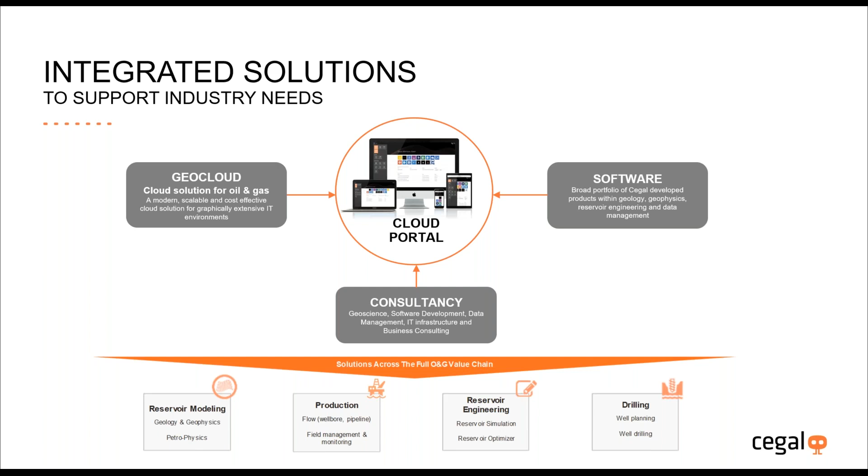And with this, I leave the floor to my colleague Gaston, who will take over and talk about Rocks Velocity, which is the key presentation as of today. So Gaston, feel free to take over with your presentation.

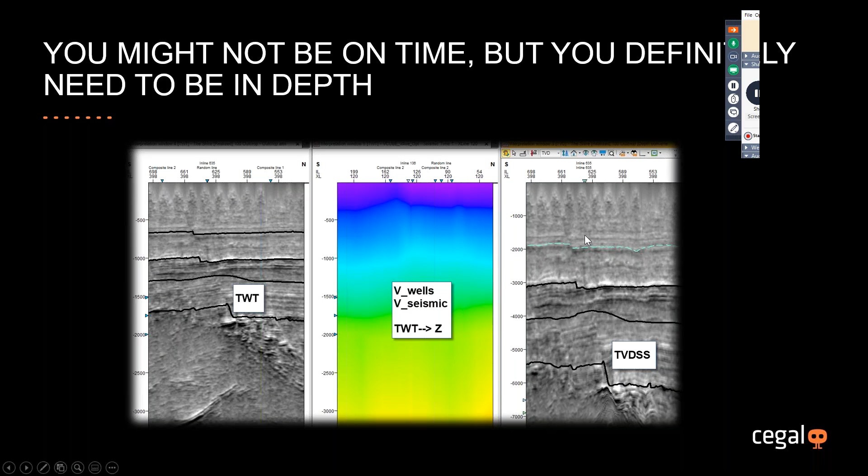So we started with this app a couple of years ago, sponsored by an operator in the North Sea, and they wanted us to help them solve some common problems.

If you start building a velocity model, you know you have some issues to sort out, like lack of sonic calibrated check shot surveys. You may have good stacking or RMS velocities providing good coverage, but they lack precision, and obviously there is noise and lots of uncertainty.

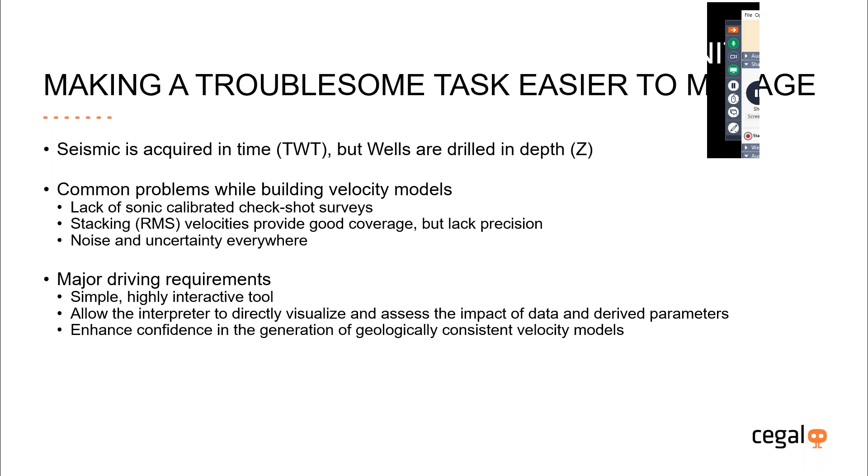The major requirement for this tool was to make something simple, highly interactive, so that the interpreter is continuously visualizing and assessing the impact of the data whenever he or she derives any parameters. So you have the ability to look at your velocities all the time and create with good confidence a geologically consistent velocity model.

This is a display of the main workflow of the app. We start by loading wells and, if they are available, seismic velocities into the application. There's visual QC, and then you go into several of the steps.

At any time, you define the surfaces and the markers. At this point, I must say we use a standard method in the industry, which is called a layer cake approach.

And we go from there - lots of tables and QC options. This is something very well received by our users, because looking at the data is really important in this case.

Then there's a workflow to calibrate the seismic velocities with the well velocities. There is no need to build any 3D grid or do some complicated 3D model building activities in Petrel - you just do it in the app.

Then you define your parameters for each of the layers that you have. But at the moment of doing this, you visualize your velocity maps almost in real time if you want.

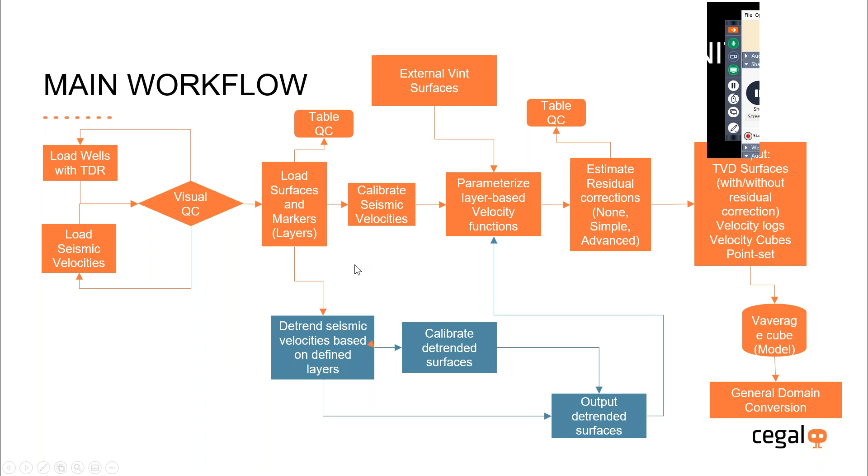We have added in the new release, release 3, a new workflow based on detrending the seismic velocities. So with this, I believe it's better to go into demo time.

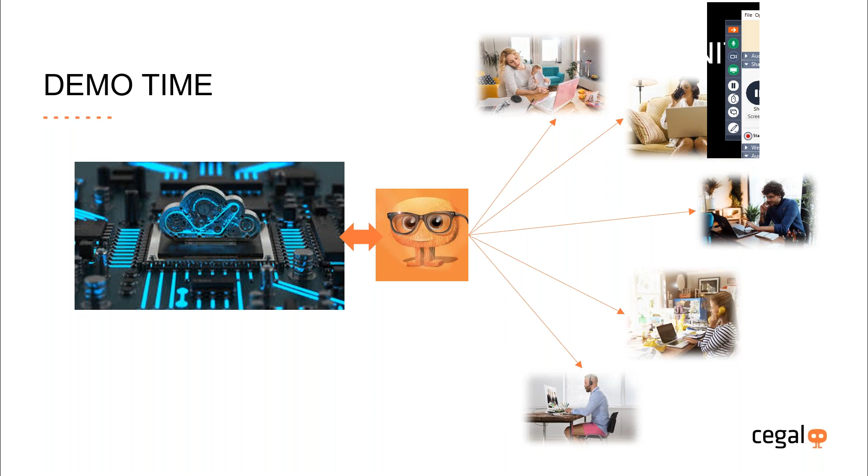This is a small project from the North Sea. We will have a few surfaces, and I also have created an intersection line where we're going to see our results.

This is in the time domain now. So we have the usual setup, some wells, some of them are deviated, you have markers, you have some interpreted surfaces, and then the challenge is to depth convert this.

There is also in this data set some additional information, like lots of stacking velocities here, and they pose a special challenge. In this case, they are not regularly sampled - this is the way they came from processing. So I had to do a bit of massaging before on those.

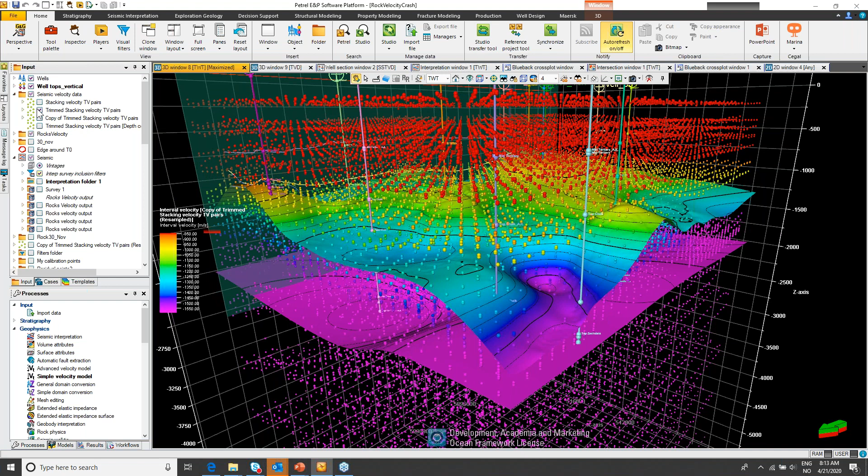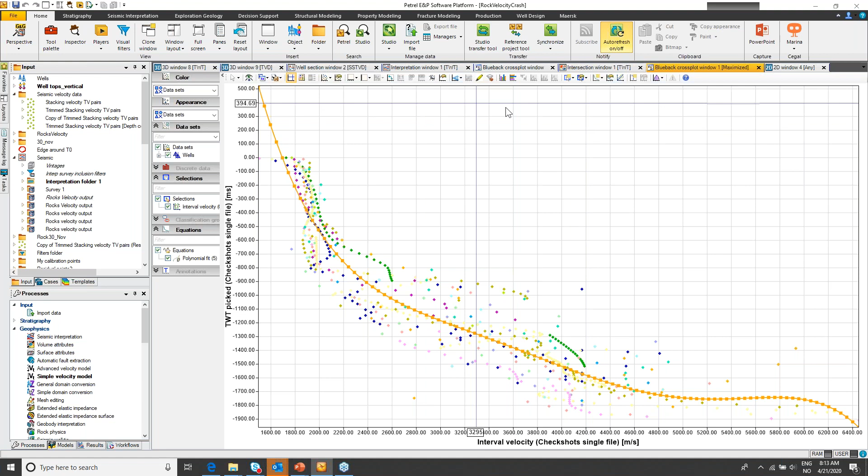But one very handy application that helped me on this is, for example, the Blueback GDI Investigator. So I was able to define some interesting trends with that. So that's a bit of staging the scene.

So I will just go and show you some of the interfaces related to our app, and rush through the workflow if you want. There is no time to do a detailed analysis on what Rocks Velocity can do, but we hope we can excite your appetite for more.

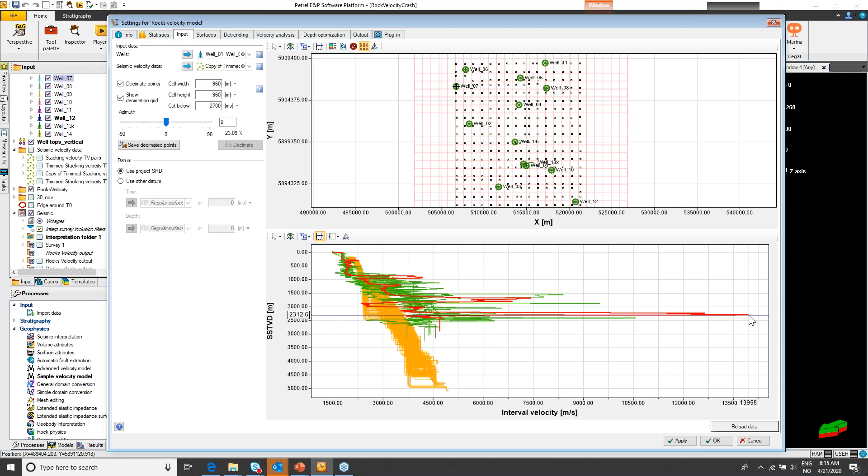Next, you go into the definition of the surfaces, where you define your input surfaces, and correspondingly you define your markers. I was talking about these tables for QC. These are really valuable tools. Here you have a lot of information telling you at the beginning already of your study what is going on.

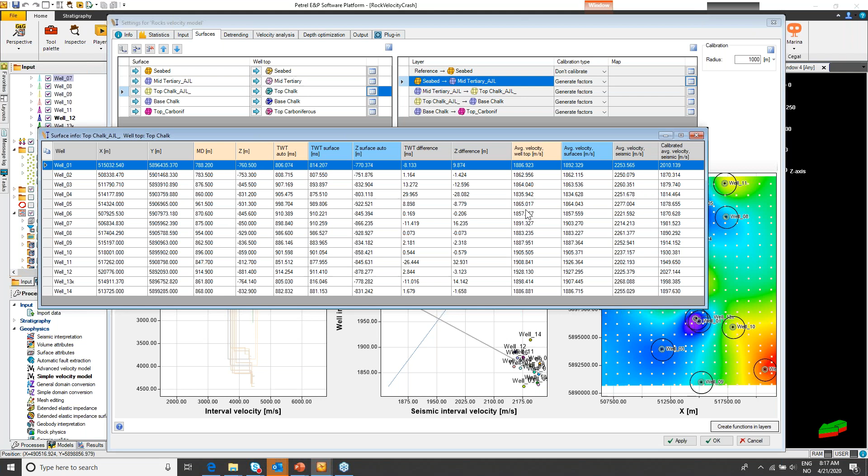We also compute other information like velocities, average velocities, and here we are displaying the seismic velocities, which you see need to be calibrated. We have an anisotropy effect between seismic RMS velocities and well velocities.

For this, one of the workflows can be done here. We can define a calibration map based on a searching radius around wells, and then understand — if you see here in gray, we're displaying the original seismic velocities. After applying the calibration, we have the same, much closer to the well here in yellow now. So we can define certain methods to do the calibration.

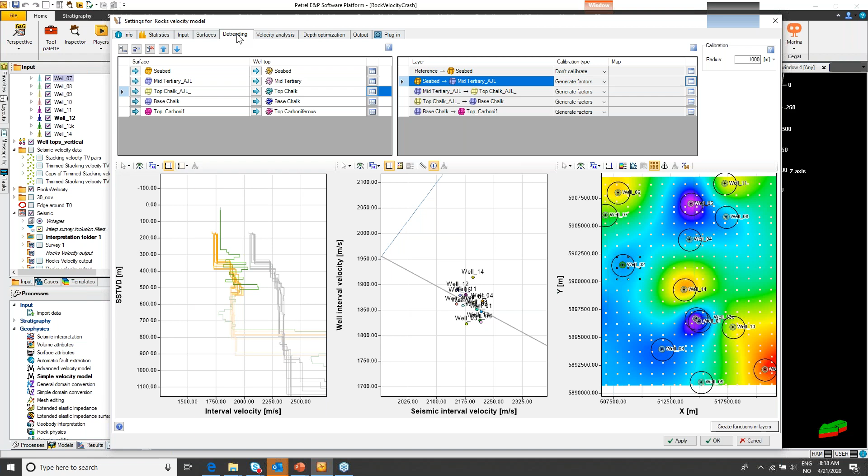Another possible workflow is what we introduced in this new version 3, called the detrending workflow, which allows you to detrend velocities based on the distance out of the trend. This is a very interesting approach, a statistical approach, which allows you to calculate interval velocities out of seismic RMS velocities, but using a statistical detrending approach.

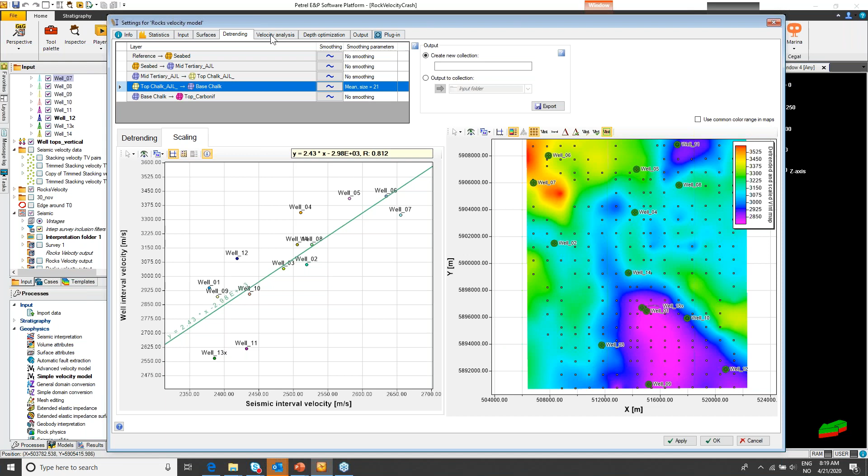What I'm showing you here is already a scaled interval velocity map derived out of this detrended workflow, and we scaled it to the velocities of the well. So this interval velocity map you can use later on in the velocity analysis step, which I'm displaying here now. This is the core of the app.

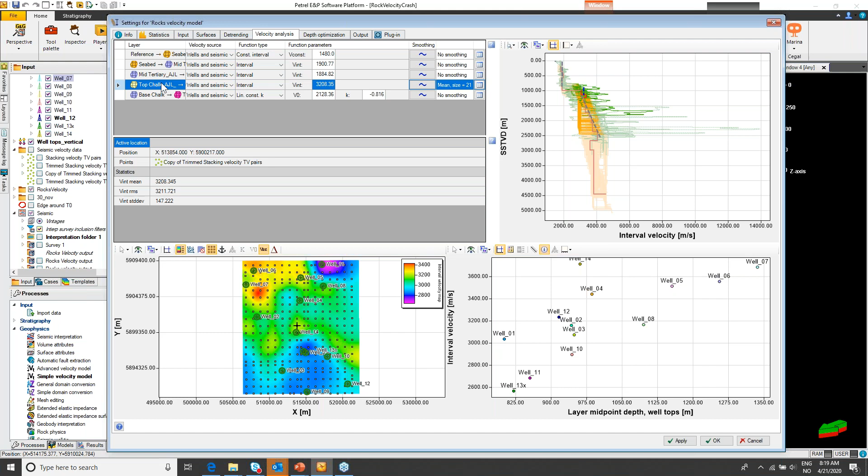If you want, here is where you will spend most of the time looking at your velocities, understanding the behavior of the velocities for each of the layers. It's highly interactive. So if you go, for example, and select and highlight one of the layers, now I am mapping the velocities inside this layer here. So I'll reduce the view, in this case, to just a well and a few velocity locations.

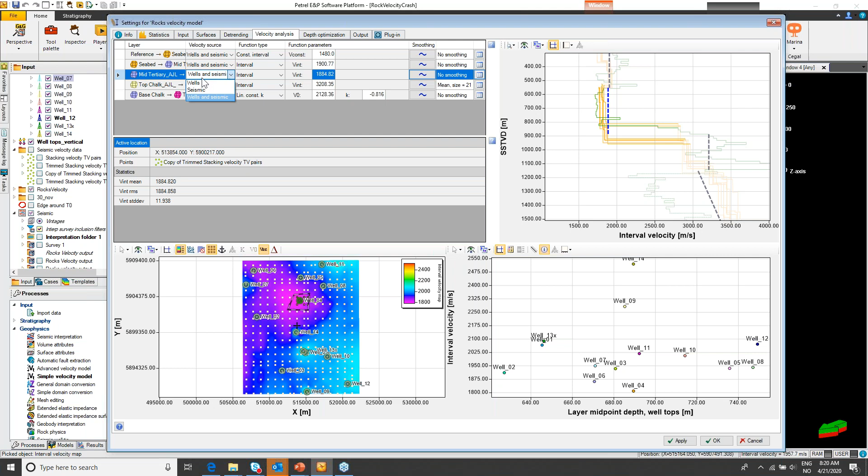So I'm telling the system I am mapping now interval velocity using wells and seismic velocities together in an integrated way. This is the interval velocity map I would get, but there are many options. I could say I don't want to use the seismic data, I only want to use the well data, and you see the map changes accordingly. So then you can see what is going on here.

There is like — this doesn't look too geological in this well 14, and there might be some reasons for that. You see the data is a bit off. So you have to take or make a decision here. Is this correct? Is this wrong?

So in one case, if, like today, we don't have much time, you can say I can mute that well only for this layer and see how this changes the map. Now this well is muted, it's not participating in the process, but I'm still getting all the values from the other wells to build my velocity map. So now this is a way more consistent map.

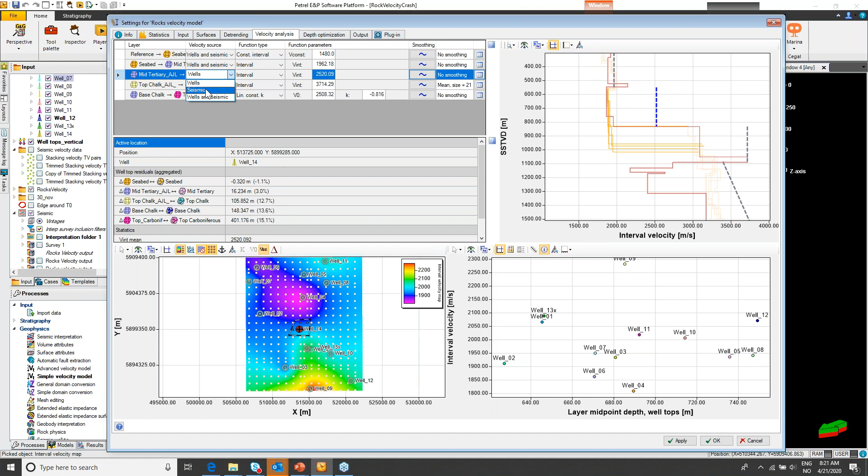So I can go back and, for example, map all these things together, and then I get a display of the velocities. Additionally, I have an estimate of my misties. So I'm already calculating the mistie values at that level, so I can have a mistie display.

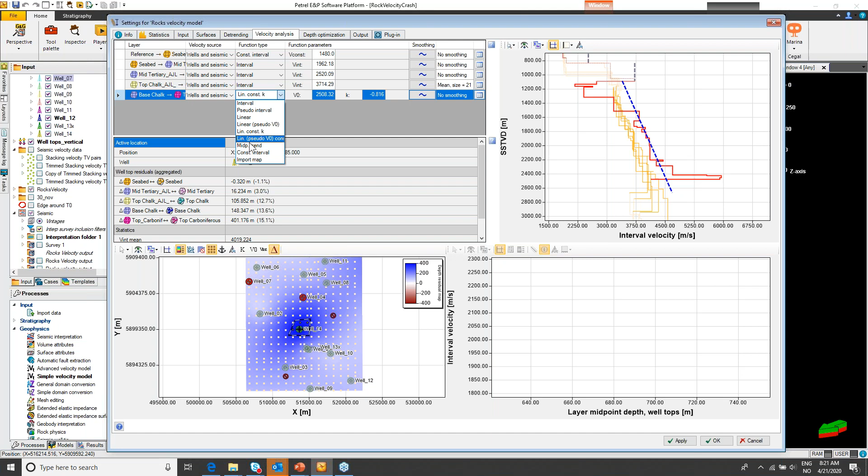There are more options that we can do. For example, here you see there is a linear increase, and that's what I've done — a defined linear increase with a constant K. So this is the classic V0-K approach, and we have different possibilities to define different parameters on that.

We could also say, for example, just a linear where we also map the K values. So this is a display of the K values. Or you say, no, we know K as a constant, so you have a constant value for K, and then you optimize based on the V0 values.

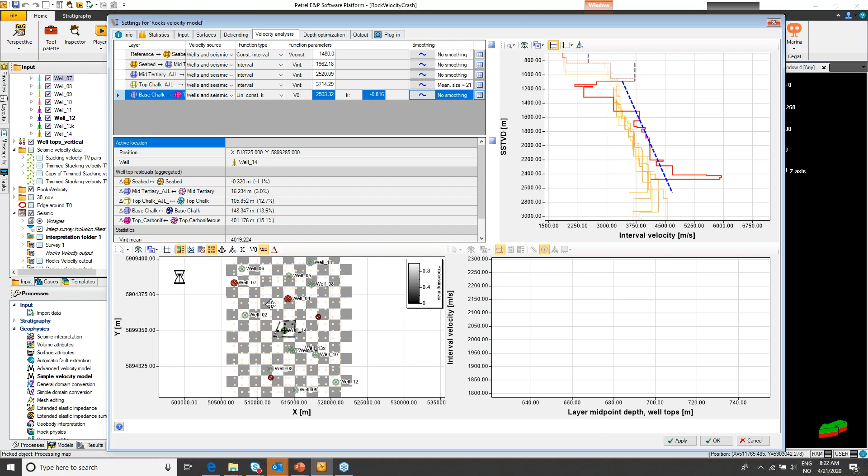This gives us the corresponding interval velocity map that you can display. These are some of the options, but the point I wanted to make is that everything you do at this stage is displayed, and you get an immediate response from the system in terms of how your velocities are coming along, how they look, and if they make geological sense.

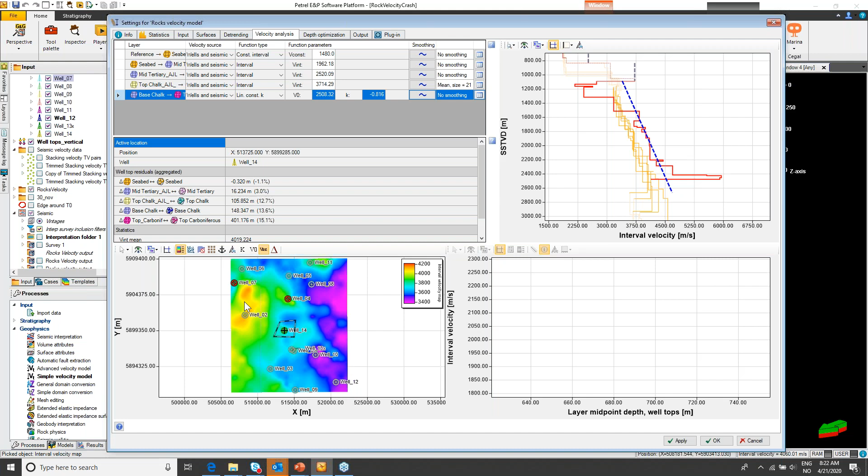This is something you need to do, because when you build a final velocity model, you need to be able to defend it at any time, especially during peer review meetings and in front of the drillers or modelers. In the next step, we look at depth optimization, which means we'll be dealing with something quite ugly, called residuals. Velocities are not unique, and all the approaches we take have several possible solutions.

There's lots of uncertainty, but it's good to try to reduce the residuals. So this plot here is a cross plot between the corresponding elevation, in the active layer, and the residuals. The triangles are the residual values, and we attempt to reduce those to close to zero. So we have the residual map, and then the optimized depth map.

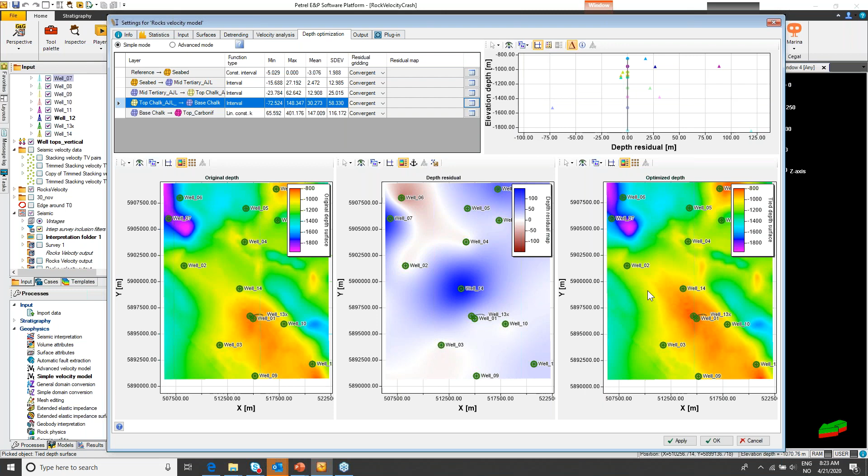This is one approach. The other is more sophisticated, where we update or correct the residuals by adjusting the velocities—making them faster or slower through a mathematical approach—to minimize the residual.

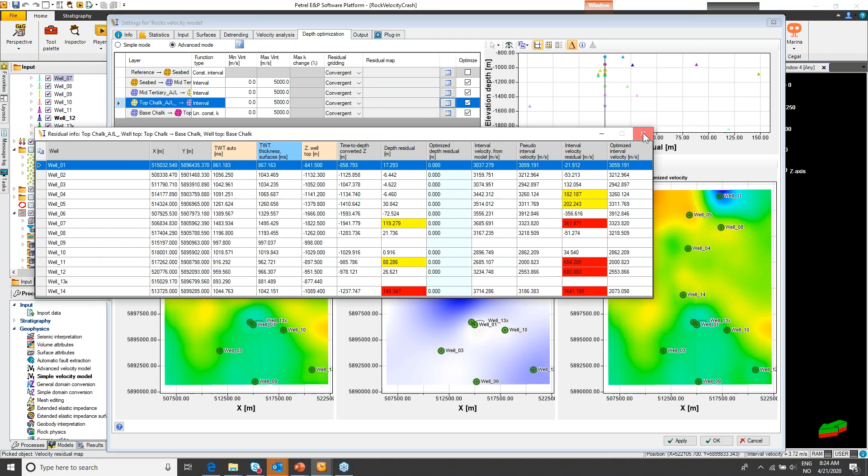Again, here you have the option to view tables with highlighted values and warnings. If we especially go into areas where you are overstressing the approach, we warn you that you might be overdoing the correction. And then finally, once you have done all this, there are lots of options to create outputs and results.

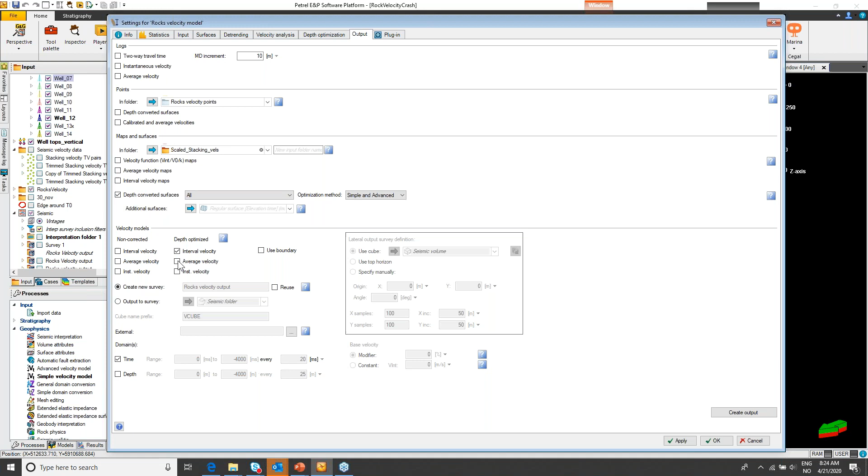From velocity logs to points, to obviously doing the depth conversion of your surfaces, and also the ability to create velocity cubes. You can define any existing seismic survey as a container for this, and then create your velocity model.

Just to finish, in time, let's have a look at the results now in depth. As I mentioned, I have this section here in Petrel, and you can display a lot of different results in velocities.

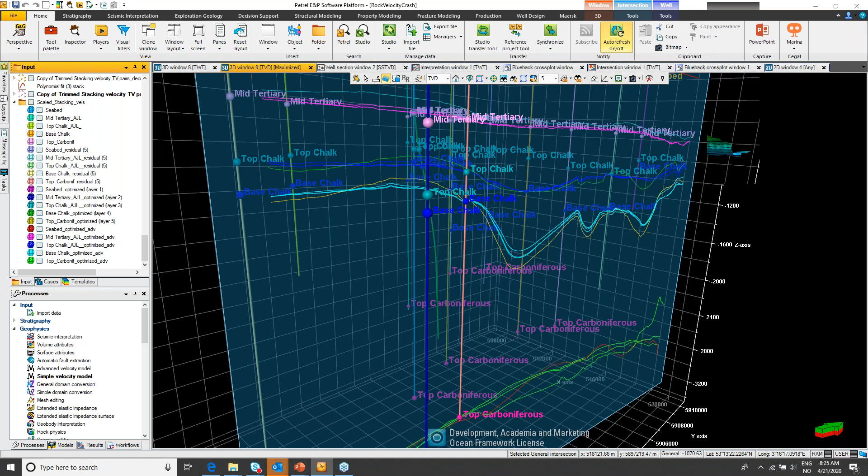So if you see, I have a set of depth converted surfaces already here. I can, for example, start displaying the mid-tertiary here. This is one of the realizations I did—using different parameters, you can get slightly different results. That would be the top chalk.

All this is now, because it's optimized, changing the velocities fitted with the markers. So you see all the depth converted surfaces here now.

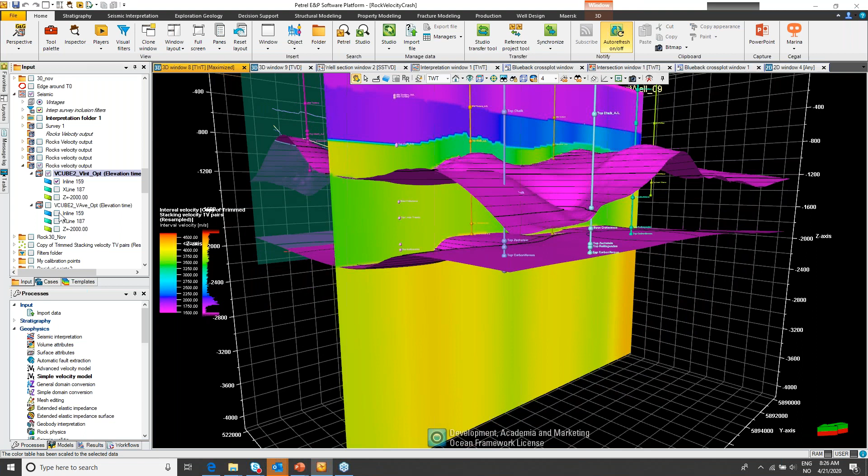And here I will display also the velocity model as such. I created these cubes. Let's change the colors here in a second. Here you have the interval velocity, and here I have the corresponding average velocity cube—it's a complete cube.

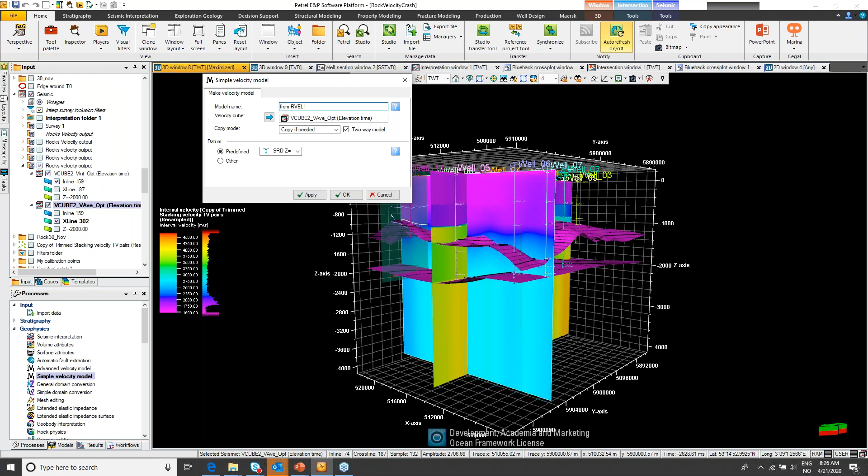In terms of integration with the other processes of Petrel, you have this simple velocity model. It's very simple to go and create your Petrel velocity model representation, which you need if you want, for example, to go for 3D grids and other aspects. Petrel will demand that you use their model representation for that, but it's very simply done. We use the output from our app and integrate it completely in Petrel—a very simple step. So that's what I had.